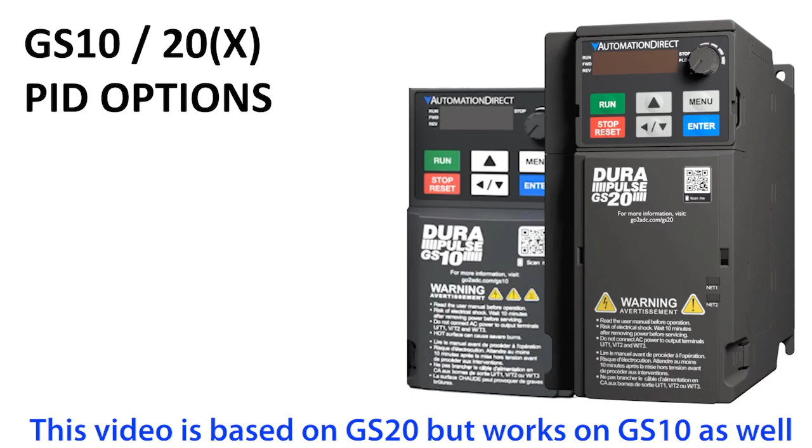The GS20 drives have lots of PID options and features. But that also means there's lots of additional parameters to wrap your head around, and that can make getting started with PID even more intimidating than usual. So in this video series, we're going to show you how to filter out all the chaff and get a simple PID application up and running quickly.

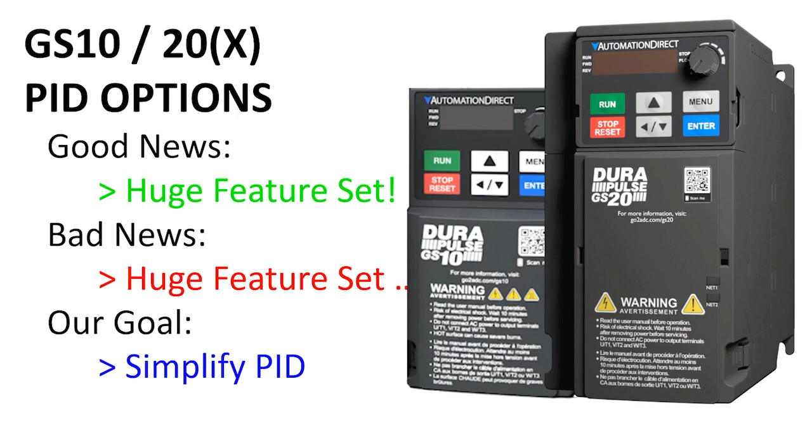Our goal is to have the GS20 drive use PID to automatically maintain the pressure in this system regardless of how many valves are open. This GS20 drive is controlling this motor, which is pumping water to these manual butterfly valves. The tank drains to a reservoir, which feeds the pump through this check valve. This 15 psi pressure sensor sends a 0 to 10 volt signal back to the drive so PID can monitor the system pressure and adjust the motor speed accordingly.

I'm assuming you're familiar with the PID feedback process where you tell the drive you want it to be at some value we call the set point. It monitors the system pressure via the process variable, takes the difference between the two, and uses that error signal to figure out how to adjust the control output. We can also bypass the PID calculations and manually drive the output, which helps us test the system.

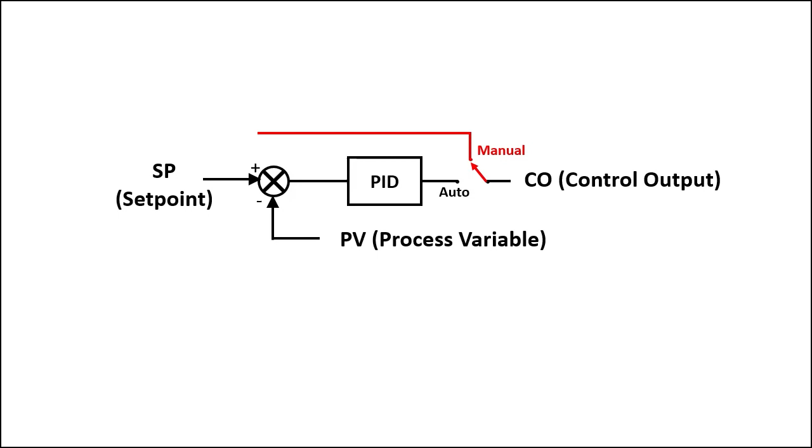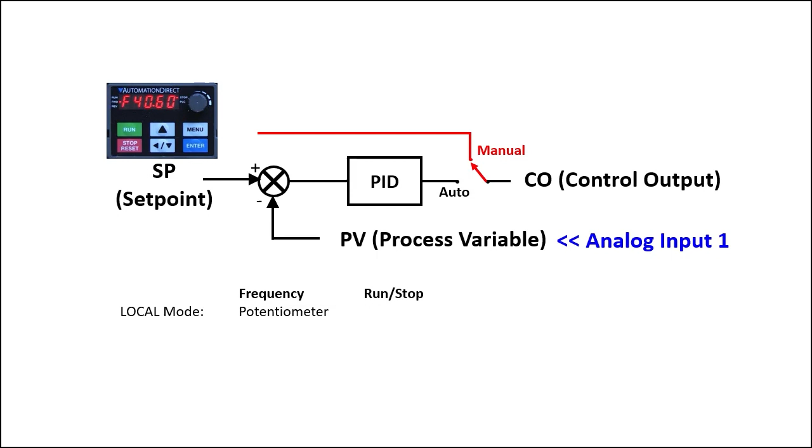This system is set up like this. We'll enter the set point via the keypad, and the 0 to 10 volt process variable will come in on analog input 1. We'll set up the drive's local mode configuration to be just a manually controlled drive where we use the keypad's potentiometer to directly control the drive's output frequency and the keypad run stop to start and stop the motor.

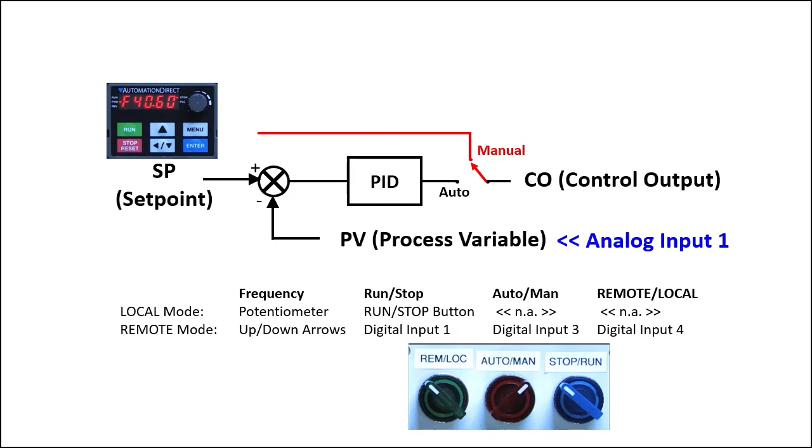We'll use the remote mode configuration to run PID, and we'll use some external switches to control the run stop, and if PID is automatically controlling the output, or if we are manually controlling the output. And we'll need an external switch to switch between local and remote modes. Sounds like a lot, doesn't it? Yeah, it is, but I have this cheat sheet that makes it super simple.

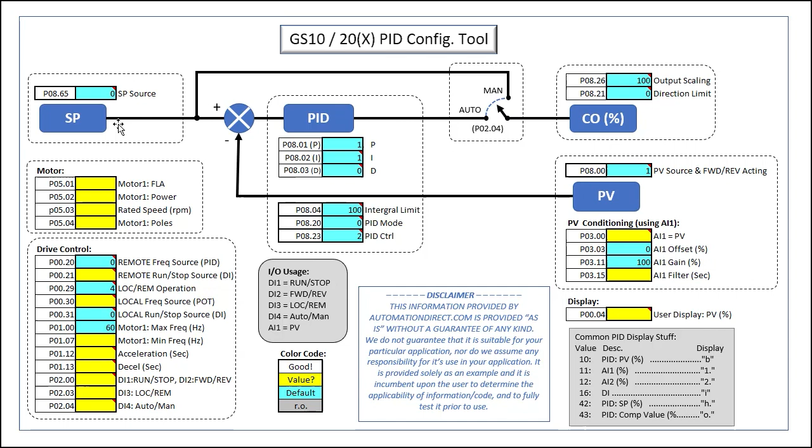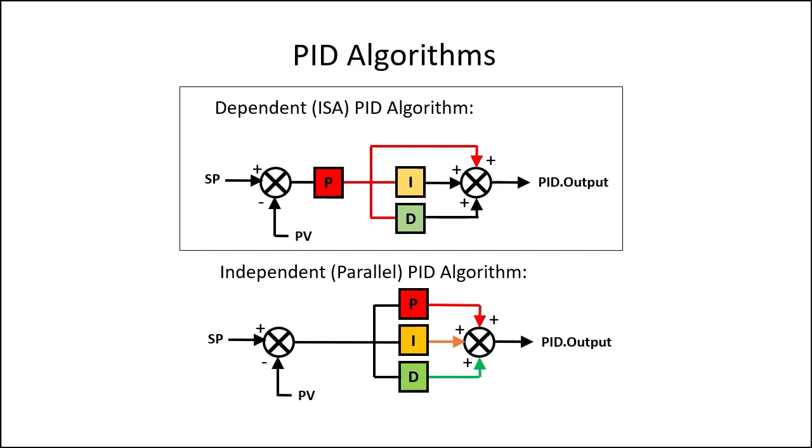Notice that the GS20 gives you a choice of two different PID algorithms. In the dependent PID algorithm, changing P changes I and D. That simulates the old analog systems where when you change the gain of the system, you change everything else too. In the independent PID algorithm, P, I, and D can be tuned independently without affecting each other. That makes it easier to tune because messing with one coefficient doesn't change the other two. This is what you'll find in most modern digital systems. We're going to use the default, which is the dependent PID algorithm.

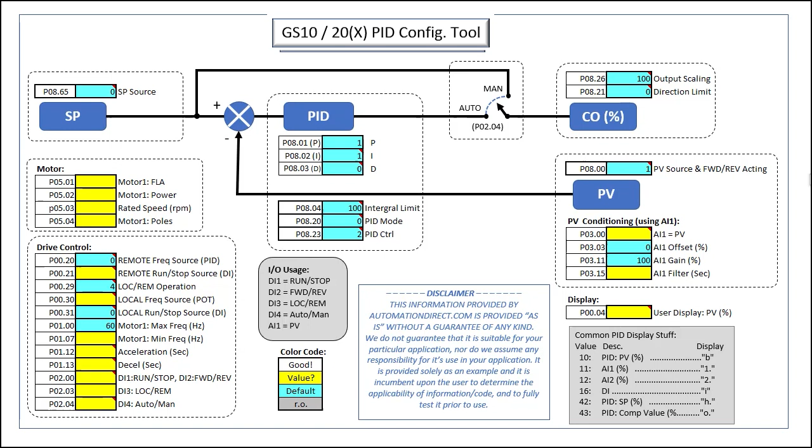There's lots of options for manipulating the control output. I'm just showing two of them here. By the way, you can see all of the PID options we're not using down here. Here are the other options for the control output, for example.

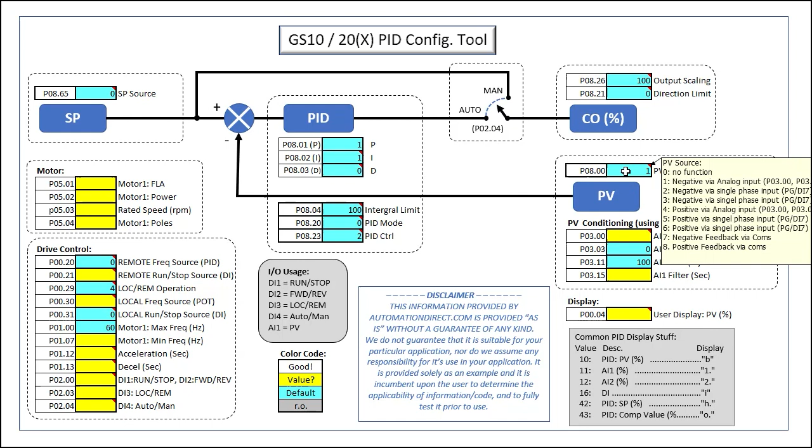Okay, we need to tell the drive that the process variable is coming in on an analog input and configure analog input 1 to do that. I'm also going to add a small amount of filtering on that analog input. You'll really want to keep filtering as small as possible. A large filter value will slow down the response of the PID algorithm. Let's tell the user display to show us the process variable.

And of course, we need to tell the drive what motor we're using. Finally, we need to configure the drive. We'll be using the remote configuration for PID, and we want the frequency source, which will be our set point, to come from the keypad, and run stop to come from the digital input. Now, I don't want to use the potentiometer for my set point because someone might bump it and mess it up. This just says local mode runs local parameters, remote mode uses remote parameters.

In local mode, we will use the keypad's potentiometer to control the frequency because it's easy. And we'll control the drive via the keypad's run stop button just to show you we don't have to use the external switch. We'll leave the max frequency at the default 60 Hz, but I'm going to change the min frequency to 0 to make our math easier. You'll see why in part 2.

You want to keep the acceleration and deceleration as short as possible and let PID control how fast the drive ramps up. Now, if you get overcurrent faults, you can increase these to slow PID down if you need to. Finally, we want digital inputs 1 and 2 to control run stop and forward and reverse. We're not actually using forward and reverse in this demo, so I don't even have it wired up. It just comes along for the ride when you choose this option.

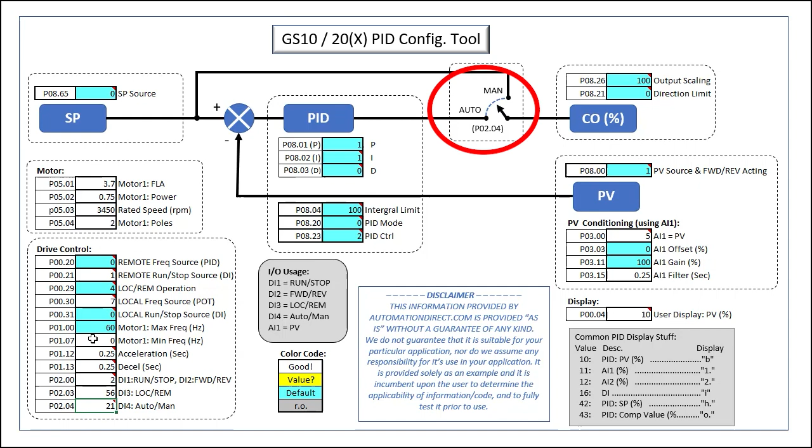Digital input 3 will be our local remote selector, and input 4 will select if PID automatically controls the motor or if we manually control the motor frequency. Well, that's it. Over here you'll find a list of all the relevant PID parameters in numerical order. That makes them a lot easier to enter into the drive. And look, we didn't change any of the blue default values for the PID parameters, did we? All we did was configure the motor, the drive, and the I/O.

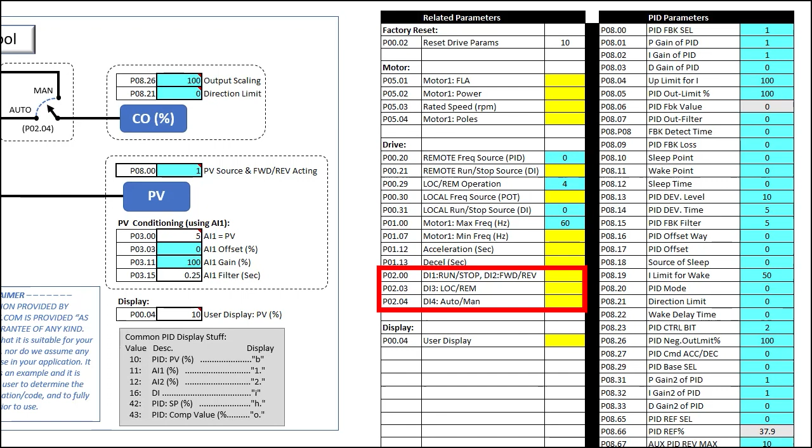I went ahead and entered all those parameters, wired everything up, and got the pump primed. We'll be using the free GSoft2 scope function to monitor the system, and I added a digital panel meter to monitor the output of the sensor because it automatically converts that 0 to 10 volt signal to PSI for me. So we said in local mode, we want to be able to control the run stop from the keypad. Yeah, that works. I see the water squirting out of that open nozzle. And we wanted to control the frequency from the potentiometer. Yep, that works too. So how much frequency do I need to get my system to 6 PSI?

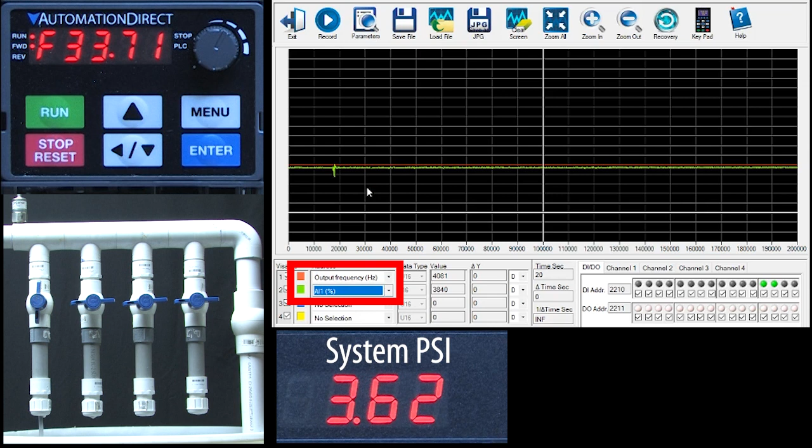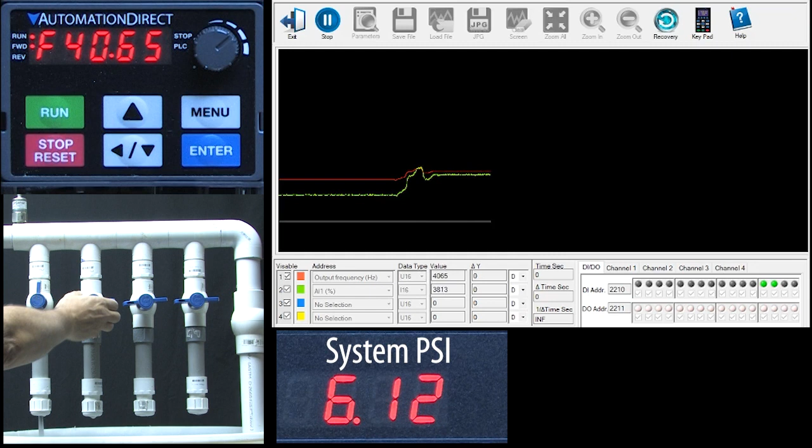Let's tell GSoft2 to show us the drive frequency and the analog input. If I play with the potentiometer a bit, it looks like around 40 Hz with one valve open will get us close to 6 PSI. On the scope, we see the frequency in Hertz and the analog input in percent. Okay, if I open a valve, we see the pressure drop. So I'll increase the frequency to get the pressure back to 6 PSI.

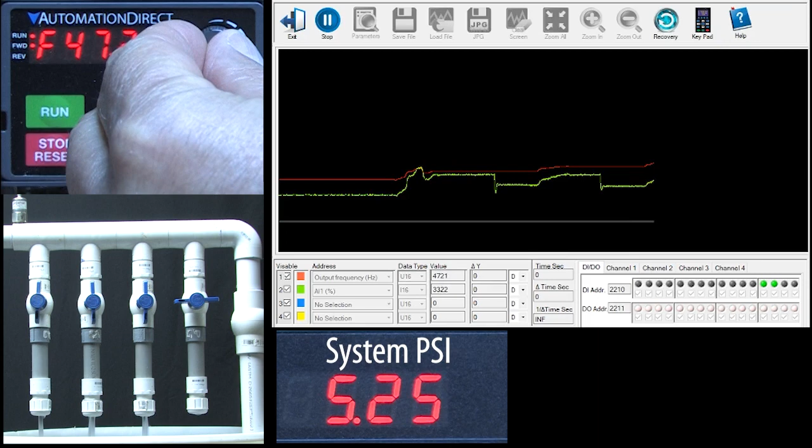Open another valve, pressure drops again. And I'll raise the frequency again to get back to 6 PSI. Open the last valve, pressure drops, so I raise the frequency to compensate. And if I close the last 3 valves, the system pressure goes way up, so I reduce the frequency to get the system pressure back to 6 PSI.

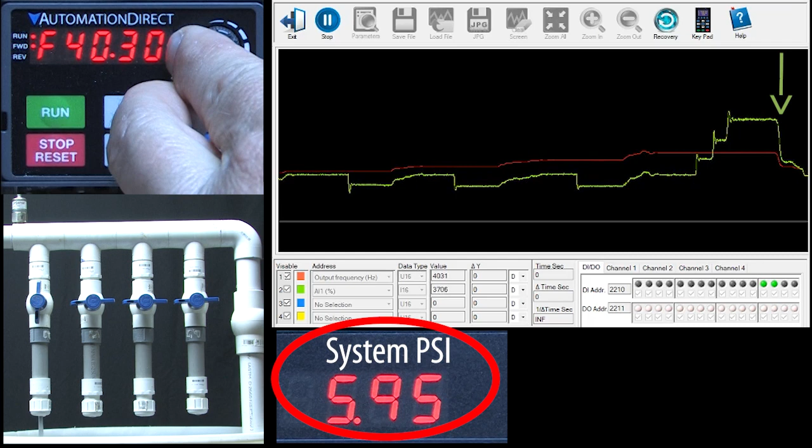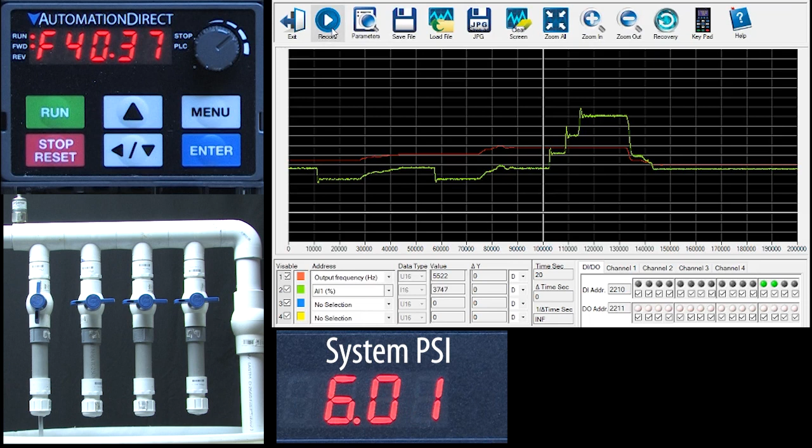So the good news is, our system is capable of keeping the system at 6 PSI regardless of how many valves are open. Now that's important. If you can't make the system do it manually, well, PID won't be able to do it either. Now we just need PID to automatically change the motor speed when the pressure changes. Join me in part 2, where we'll flip over to remote mode to turn PID on, and we'll play with it for a while to get comfortable with how PID works in the GS20 drive.